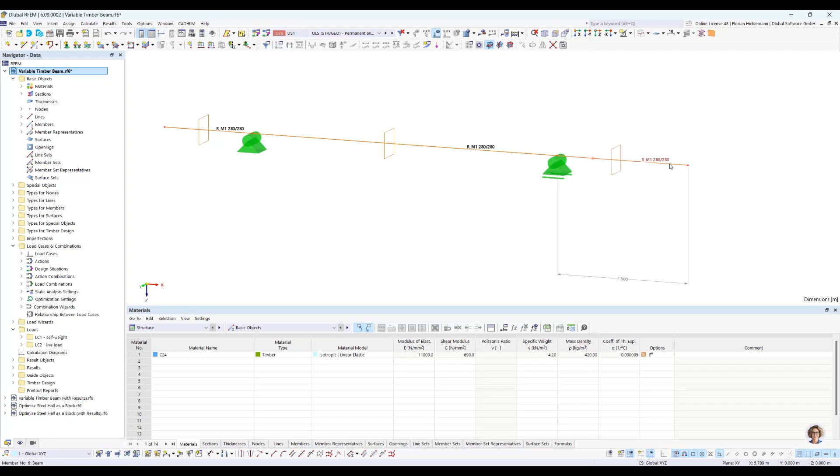So let's dive into the program. And as you can see here, the first model is a variable timber beam. This one has nothing to do with blocks at the moment. It's just for demonstration purpose of the new features I just explained in the PowerPoint. So what do we see here? We have an easy static system. It's a single span member, and at the ends there are some members reaching out on the left and on the right side. It's a rectangular cross-section. And of course, when we are dealing with optimization, there are some global parameters in use.

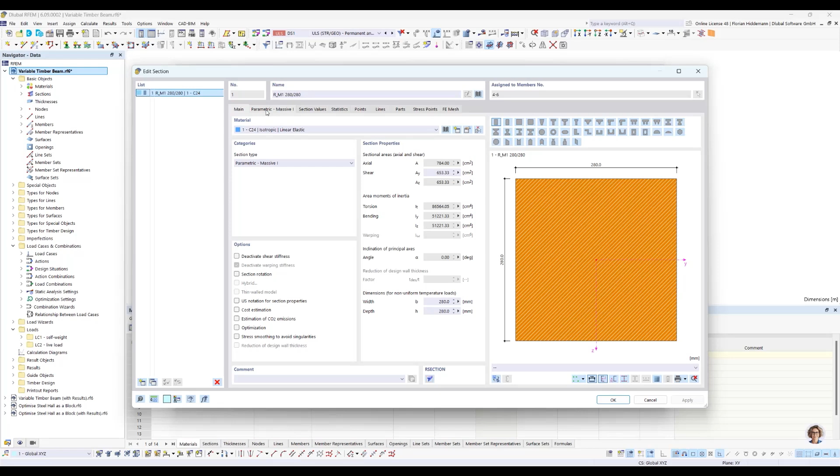So we start here with a 280 by 280 cross-section with C24 timber material. And as you can see here, the cross-section width is given with a global parameter and the cross-section height also. In addition to that, the distance of the right support is also variable. I can show you now here the overview for the global parameters. The beam length is just a constant, which is easier for me to make the model. And the left support distance here is just a constant.

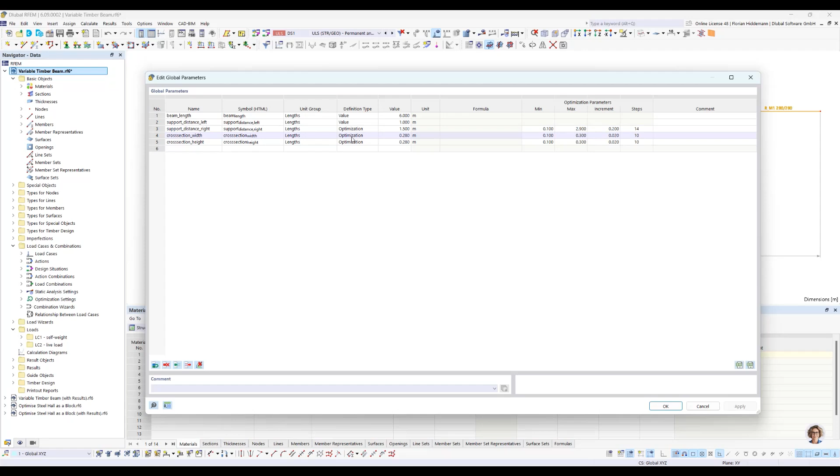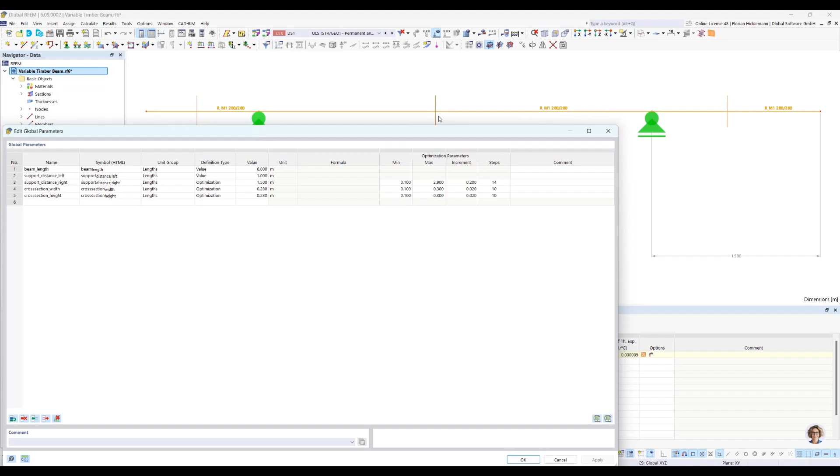And we would like, in this little example, to find optimal solutions for the right-hand support distance, which is now 1.5 meter, and for the cross-section width and height. This parameter here, the support distance, can be varied with 0.1 meter from the right side up to 2.9 meter, which is nearly in the middle of the beam. The cross-section width and height is going from 100 millimeter to 300, and it's going in steps of 20 millimeters. So you have 10 steps in between, and this is the variation this cross-section can take into account.

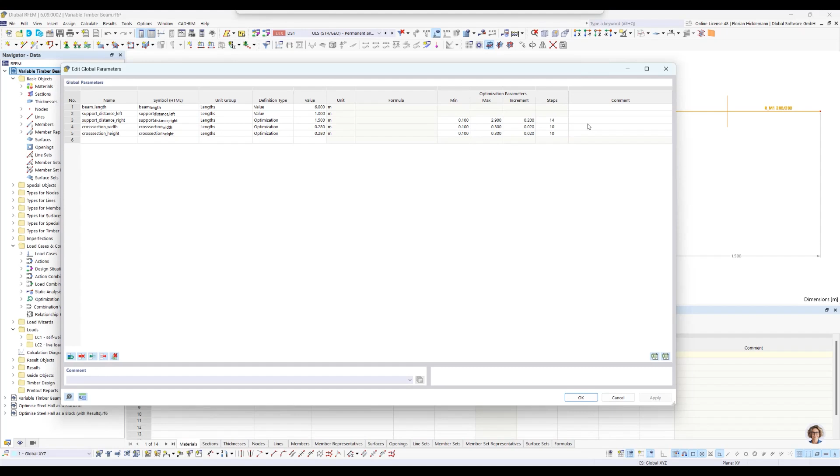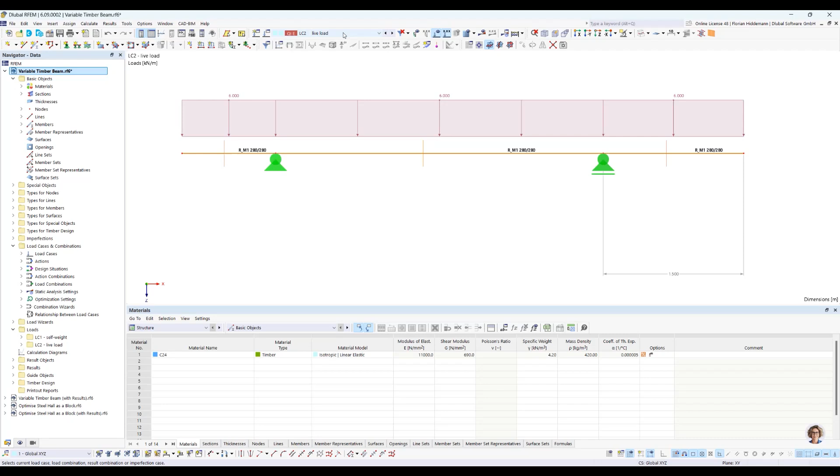So let's have a look at the first feature: recognizing valid mutations in the result list. So for this reason, I activated also the Timber Design add-on. As you can see here, Timber Design is activated. And I just made, for the demonstration purpose, easy loads. You see load case 1 with some self-weight. And there's another load case with a live load. We use here the German National Annex, of course, and a combination with it.

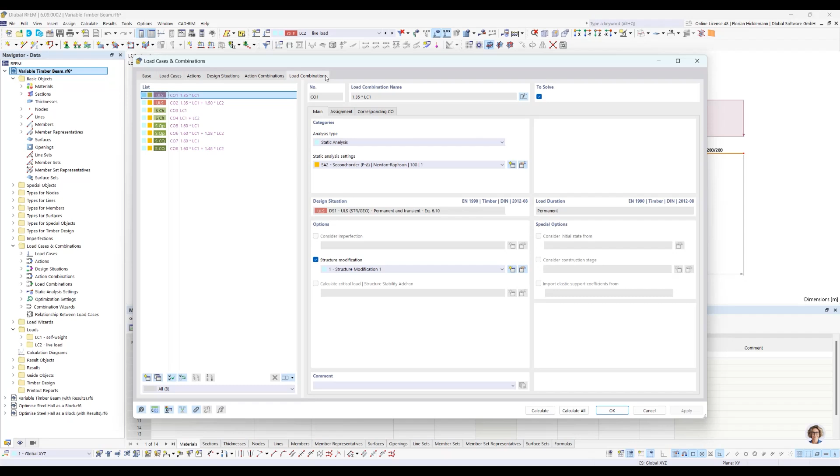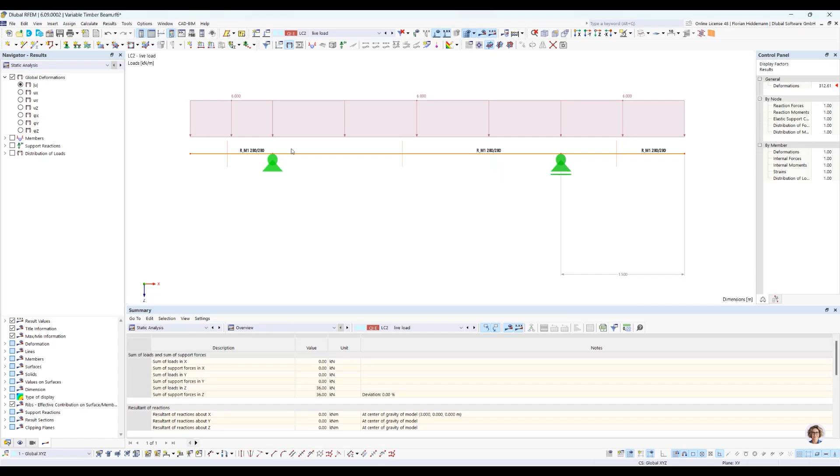So you can see design actions. It's all standard, which you are maybe used to already, that we do some combinations and design situations for you. So you don't have to worry about all the timber design specialties. So let's calculate the system in the first place to see what we are talking about here. So now it's a standard calculation without optimization. You can see in each run later on, all these calculations are performed for each mutation.

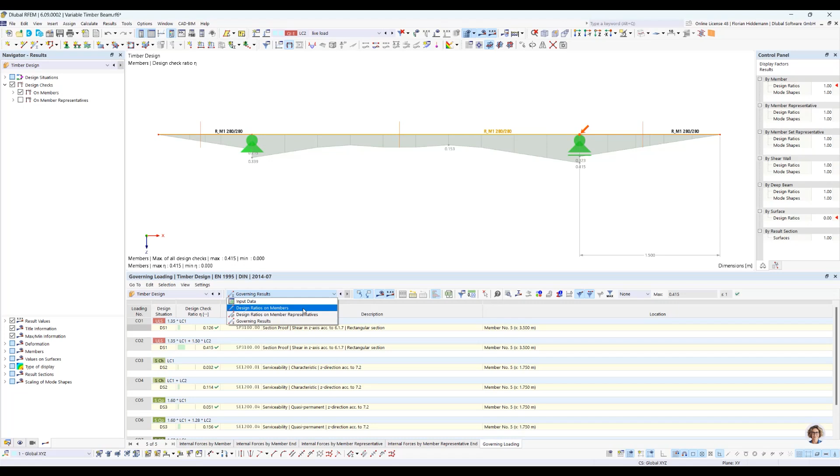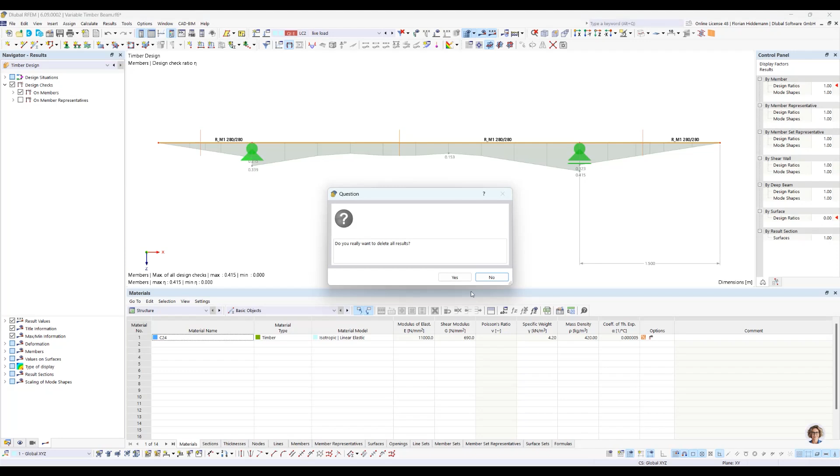And as we can see in the governing results of the design add-on, everything in this configuration looks fine. But we are here to find out if there is an even better configuration or not, and to play around with our optimization feature to see what is happening there. So let's delete these results and jump into the optimization settings. You can find it here under Calculate if the optimization add-on is activated.

So you can store different optimization settings. It's not necessarily one you have to fiddle around with. You can copy it, modify it, and use them for different purposes. This is quite handy because there are a lot of settings you can do, and so you can remember each different optimization run later on.

So what do we do now in the first place? This feature I show you later on. This is the multi-stage mode, the multi-stage calculation. And even with this very simple system here, all mutations would have a total number of 1,815 optimization mutations. This is a lot if you consider that this is a very easy and simple system here.

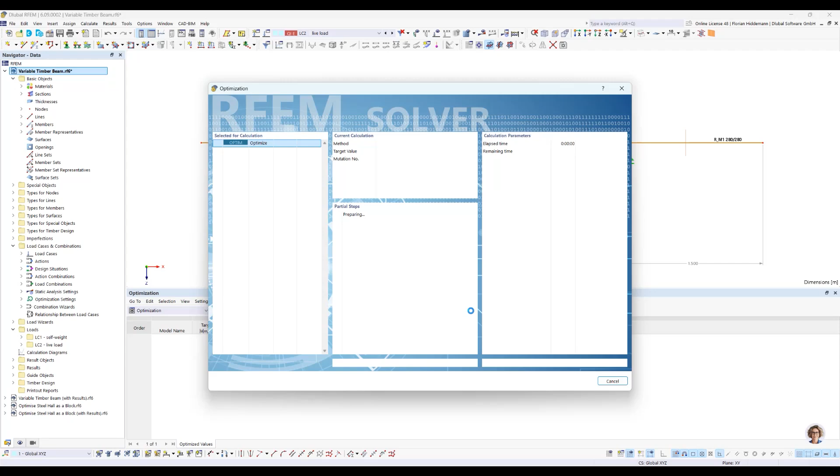So as you can see in the background, the first iterations are calculated. Each one of these mutations is also calculated within the timber design add-on. And for this reason, you see model number 1, calculated with these parameters, didn't fulfill the design checks. Model number 2, like in our first example, fulfilled it.

So with this algorithm here, it's just a random mutation. There is no clear strategy for finding the optimal target value. The program at the moment is just giving random examples for these 3 values or parameters and collects all the results. So with this nice feature here, we can see easily which calculation fulfilled design checks and which not.

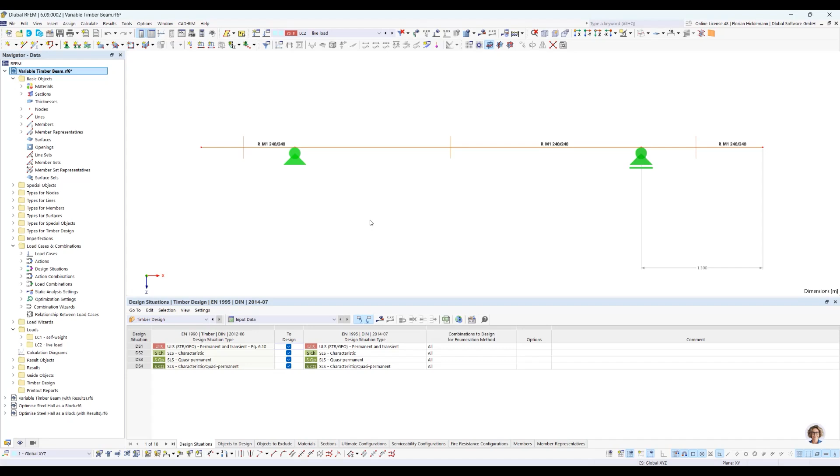And now if I cancel this calculation run here, today I will be mean to this model and cancel it anyway. So what you can see here, the calculations performed up to this point are stored. We have now 8 results. And as you can see here, the green checkmark means, it's very important to see it again, this model is now active, and because I canceled the calculation run, the add-on doesn't calculate the last cycle. So if you jump into a new model in the list, you have to calculate the model itself.

We store only the results you can see here in the list. Obviously, we don't store every full result which is calculated for each model. If you have a bigger model, that would be hundreds or thousands of results. But we collect the target value and everything you need to display this result table here. From this point, you can then regenerate your model because the add-on varies the parameters as they are stored here, the way the model mutation shows it.

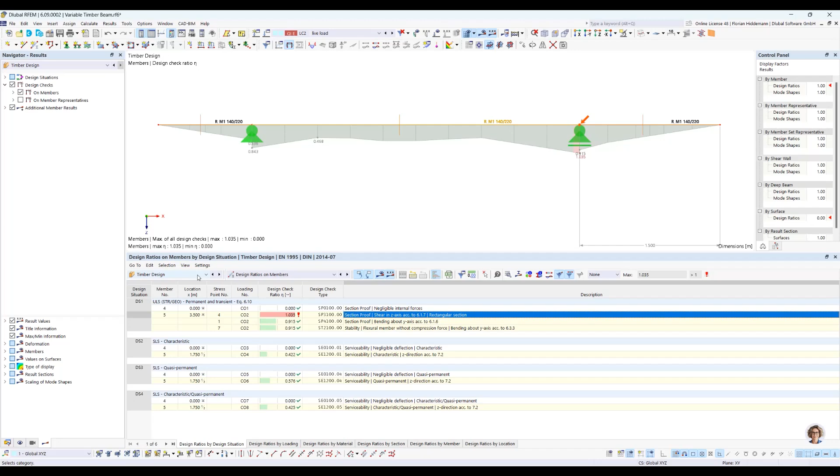So for this model number 7, I calculated it now, and here's a green check mark. And as you can see, this means that every design verification, every design check, is fulfilled. So let's see model number 1, for example. I change it here, perform a calculation to see what was going on, why there is a red exclamation mark. And as you can see, close, but it counts. The section proof here at this point on the left side is not fulfilled. So this is the way this list works with these indicators.

The next feature: the results list remains consistent. It's easy to show now because I canceled the first calculation run, and maybe at a later point, for example now, we would like to go for a new optimization run. So all I do now is say, okay, try to optimize it with a particle swarm, calculate 2% of the possible optimizations. As every time, I make the optimization cycle here active. This is kind of a safety feature so that you are really aware you perform an optimization run and don't do it accidentally if you calculate all.

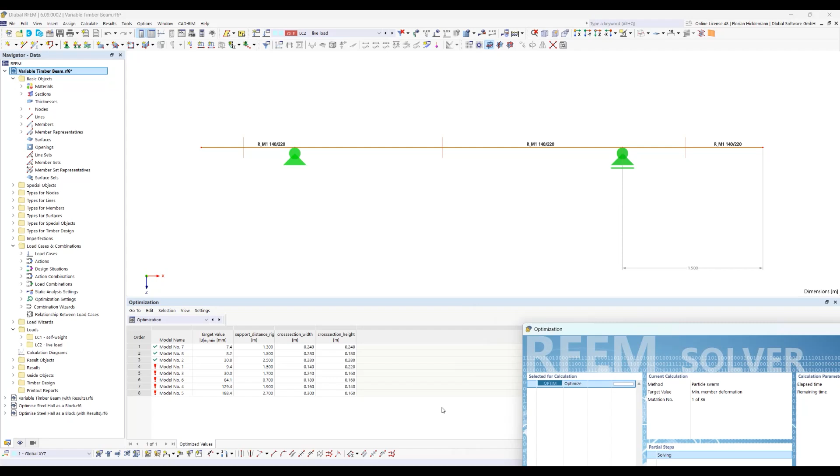Okay, so what will happen next? Let's see. You can see the results list here is stored. There is no new list, and this is a small feature, but very useful if you already spent some time with your model and calculated it, because now the optimization add-on checks each new mutation. Before it calculates it, it looks into the result table and sees if this mutation was already calculated upfront. If this is the case, we jump automatically to the next mutation without calculating it. And if the model mutation is a new one, not stored in the list, the add-on just calculates it and adds it, like you can see here in the background.

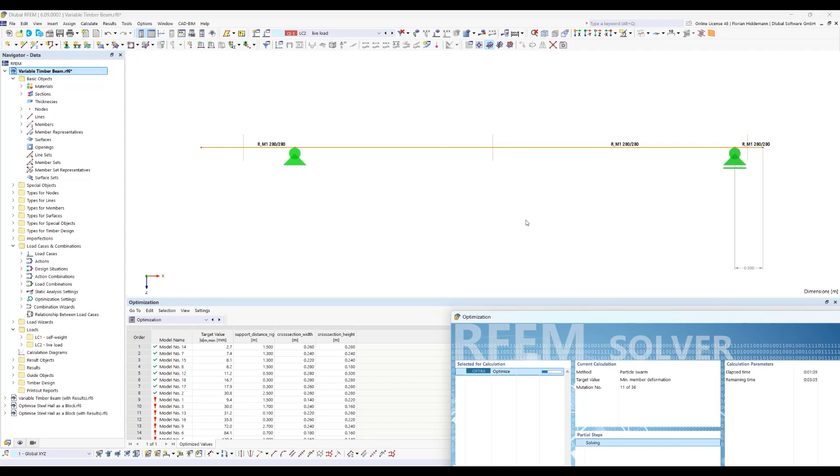So as you can see here, now it's more straightforward because the particle swarm is a solving algorithm which tries to vary these parameters with the target value in mind. And the more you calculate, the more it gets, let's say, a mathematical feeling for which parameter needs to be adjusted in what way to achieve the best target value, which at the moment is the minimum member deflection at every point. So the 2.7 millimeters, let's have a look into the program and cancel it again.

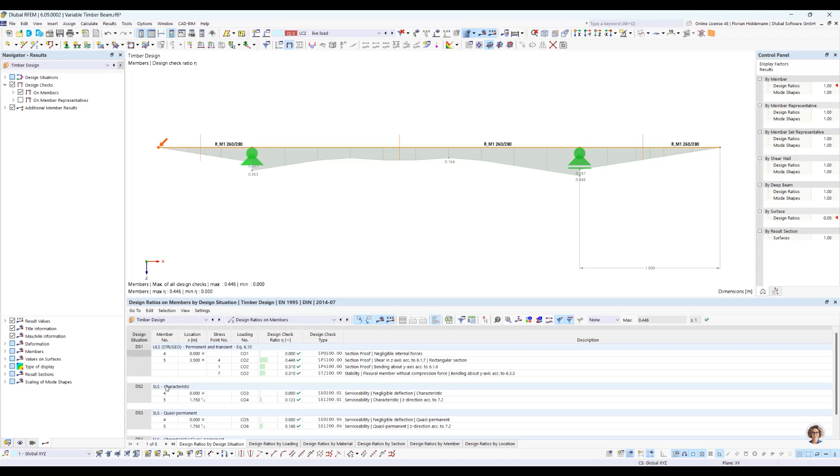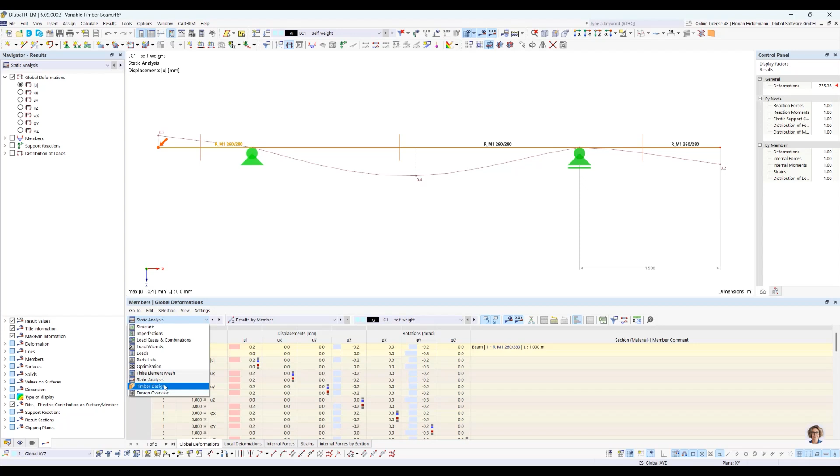Because we aborted the calculation, I need to perform a manual calculation of the system here. So let's see. Every design check is fulfilled. And for the target value, it should be there. I go to another model. Okay, yeah, I found it.

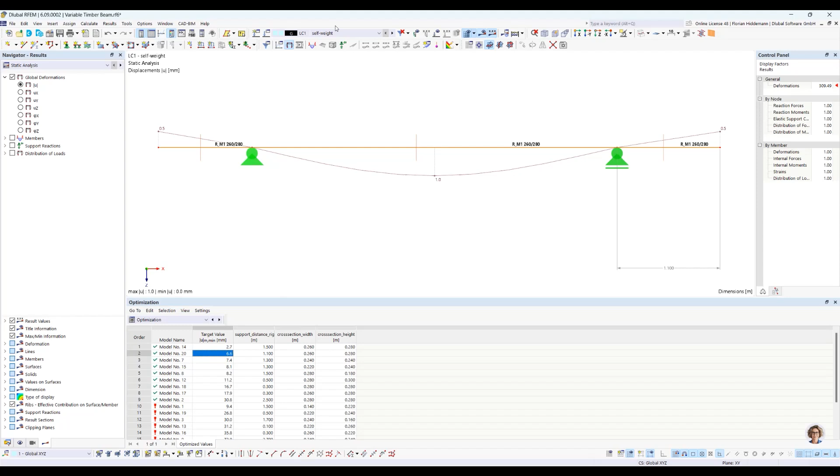Okay, we are looking for 6.6, and this is considered in the overall design situations you set up. So if I go to the maximum load here in design situation 1, the ultimate limit state, here you can find it's this part here in the members is 6.6, and this is considered as a target value. It is looking for a global minimum to minimize the maximum member deflection at any given point.

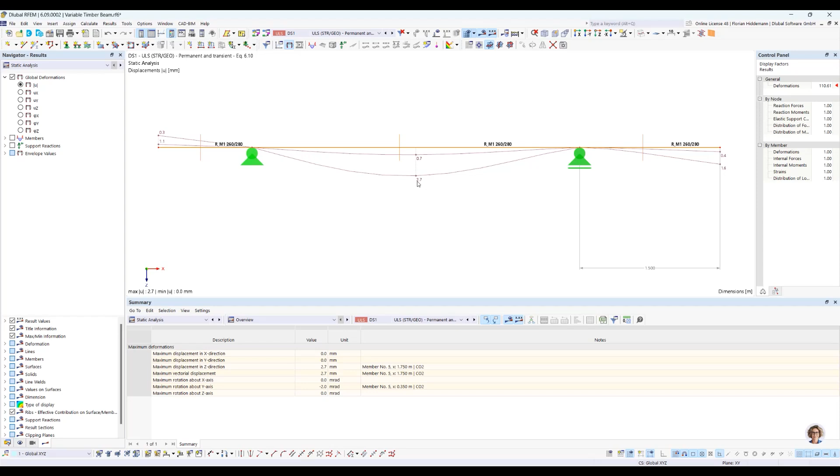I'll give you some time to let it sink in. And now we are able to find out the 2.7 millimeters. Just to be sure what's going on here in the background, you can see the 2.7 at this point. So this is a small introduction example for working with the list here and its ability to store results from every optimization run.

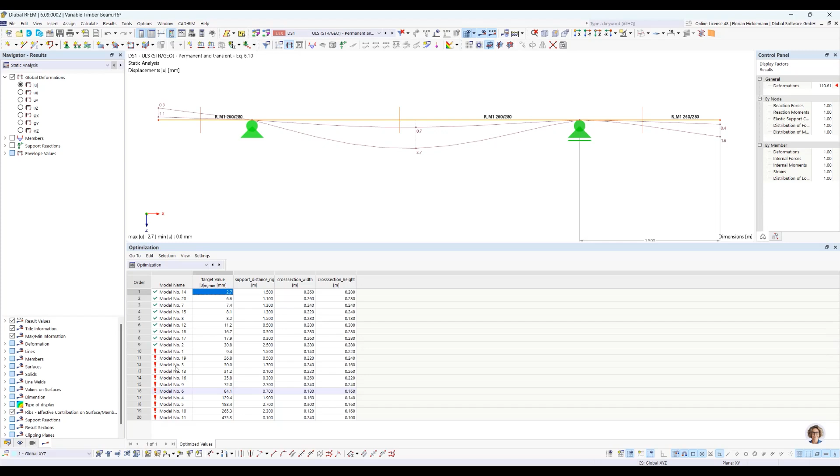Let's go to the next topic, the sensitivity factors. What is going on with that? In the model now, we have 20 model mutations calculated. And now here in the table of the parameters to optimize, you can see some sensitivity factors. They are now estimated given by the model results list here. So we can now perform an analysis of how the target value is influenced by varying different parameters. This estimation gets more accurate the more models you calculate.

With this small amount of 20 models, you can see the cross-section height should have a big impact on the desired member deformation, much bigger than, for example, the cross-section width. If you're familiar with how stiffness in such a system works, that's absolutely plausible, because the height of a cross-section goes with the third order, and the width goes with the first order, into the stiffness of this beam. So it's a very plausible result.

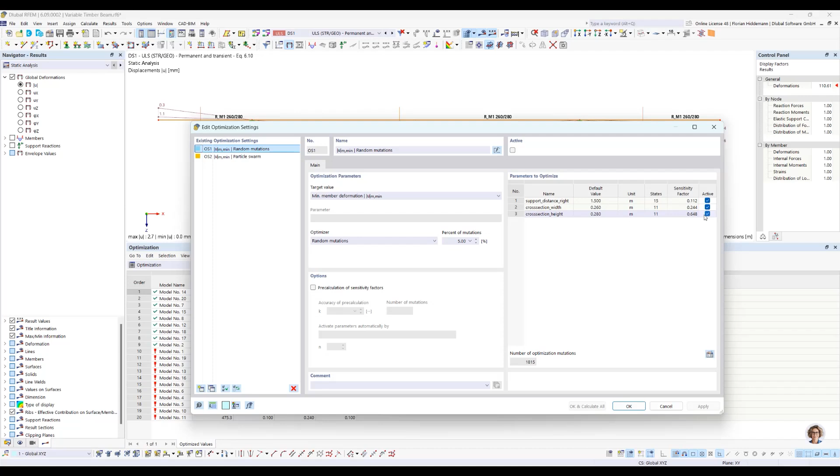These two parameters have much more influence than the support distance. That's something you can already see in this little model. Here it's easy to have an overview by yourself, but think of more complex situations where you vary different parameters and don't have a feeling for what would happen with different combinations. This is very nice for reducing the number of optimization mutations, because you can choose, for example, okay, if these ones are so impactful, why should I spend calculation time on this one? As you can see, it reduces the number of optimization mutations drastically, because now it's 11 by 11 and not by 15 anymore. So here we have 121 mutations.

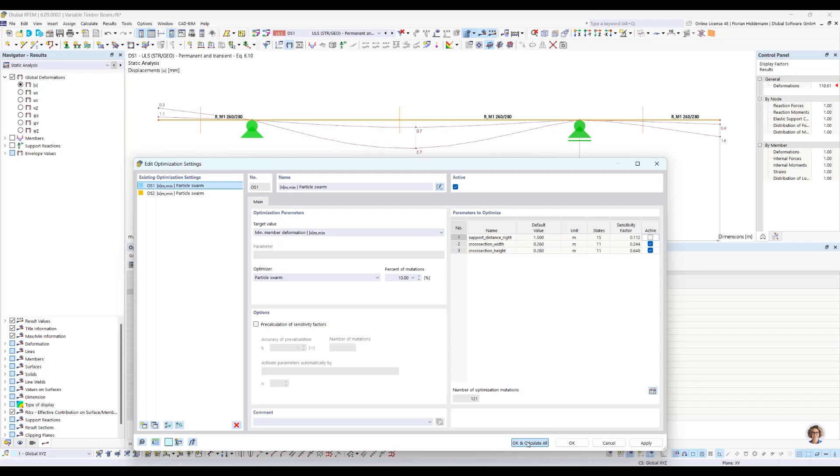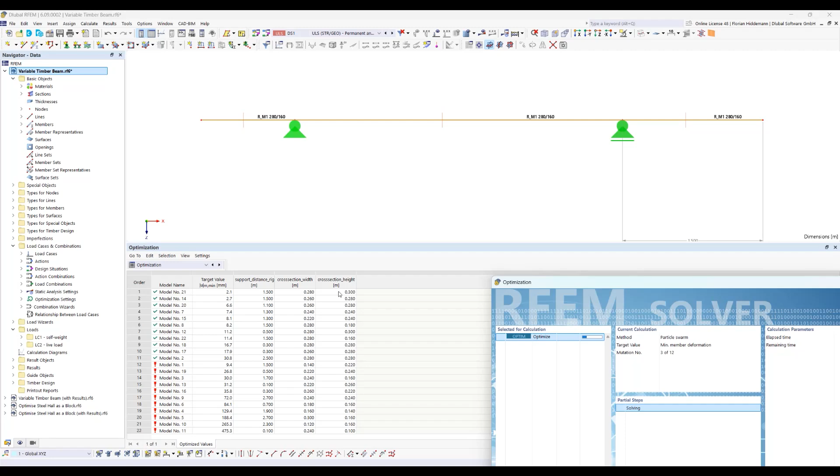And this is much easier for the algorithm to perform, with more potential, better mutations. So now, because I set it here in this dialog with only these two parameters active, the model fixes the 1.3 meter support distance and just varies the second and third one. Okay, this is a basic introduction, remembering our new features.

At this stage, I can show you the multi-stage calculation as well, and for this reason I would go back into the settings, and we choose another optimization setting here, and now we have a look at this option, the pre-calculation of sensitivity factors.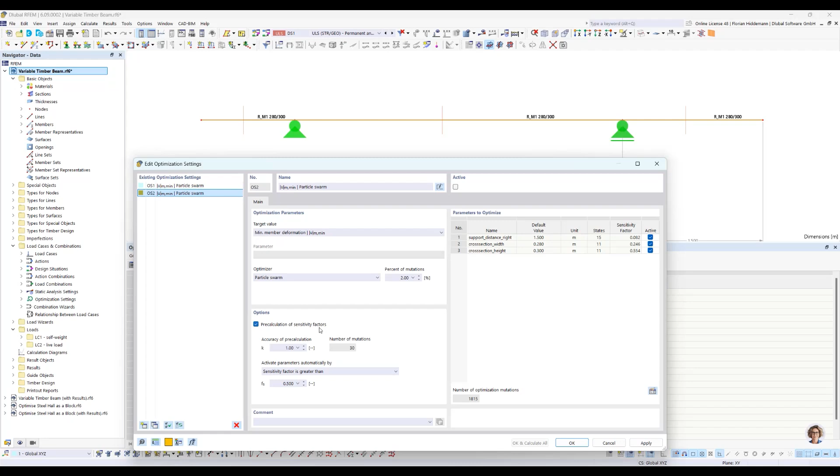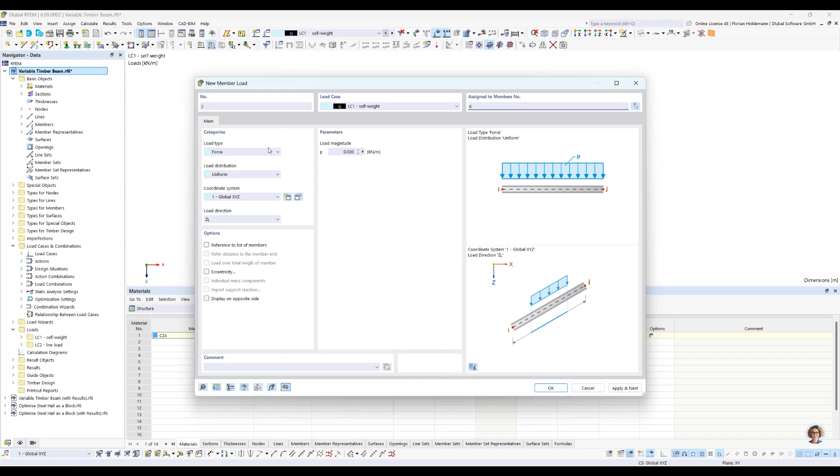For this reason, I will empty this list by varying the model. This is something you need to do now, because the list is stored. What I do now is delete a load here. And if you change the model in a drastic way like this, all the results are deleted. So make sure you're aware that this will have an impact on your optimization results. Now we can start with a clean structure here.

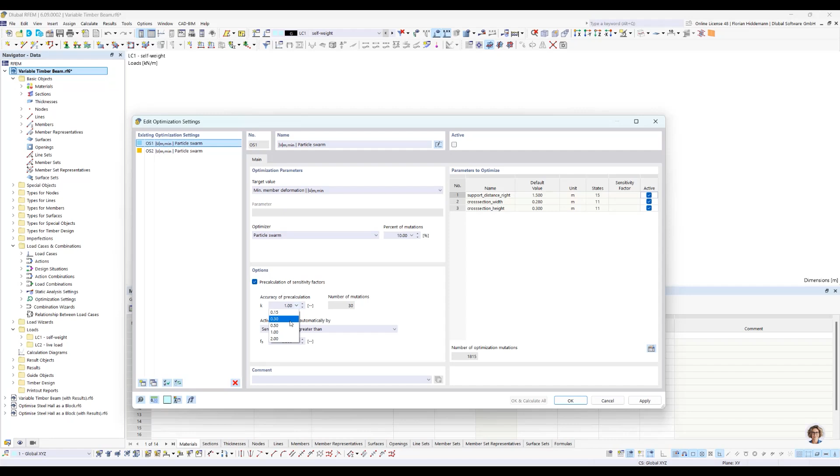For the next run, I say please make a pre-calculation of the sensitivity factors. In this example, let me make only a small guess with, let's say, 5 mutations. After that, the program should automatically combine 2 parameters in each following optimization run with the highest sensitivity factors. So it's a bit abstract and complicated, like most things with this add-on, but let's see what's behind it.

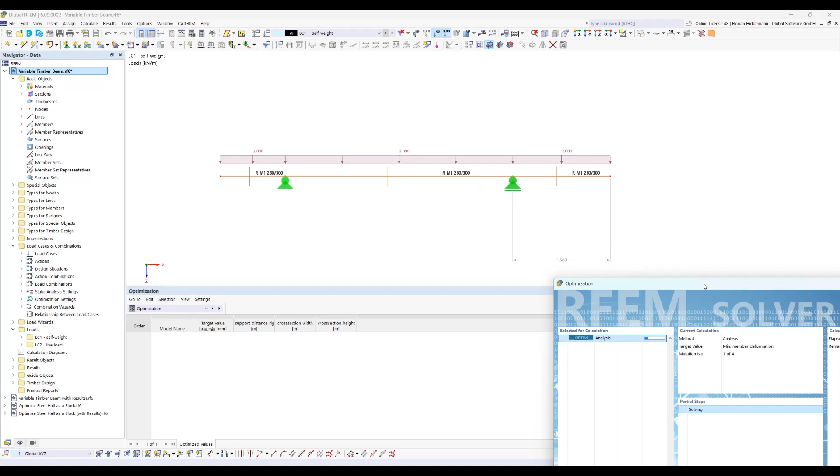So now we have a multi-stage calculation. In the first place, we are doing the analysis. The model is now varying some parameters with a very small amount of models to guess the sensitivity factors. It's analyzing the results here and the impact, the estimated impact of these parameters on those result values. And as said before, the more mutations you calculate, the more accurate this estimation is.

And now it goes to a second step. It uses now the results from the analysis. And here it is combining the two most influenced parameters with a particle swarm that calculates 10% of these possible combinations. And the 10% is now only 16, not 181. I'll show you that afterwards.

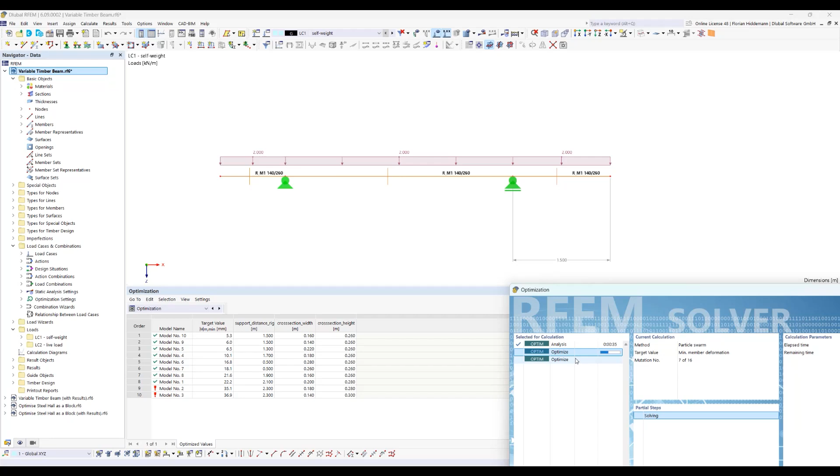And you can see after this optimization run, there is another optimization run waiting. In the next optimization run, the program goes further and says, okay, I have now combined the most influential with the second influential parameter. And just to check it in another run, I go through and perform a calculation with the second best parameter and with the third best, because you choose to combine two parameters at the same time. This is the strategy the program is choosing to go through these combinations.

So the total amount of calculations is the first one from the sensitivity factors, 4 in this example. And after that, it's here 16, and then depending on the other value, around 15 to 20. And it's much less than 10% of all 1,800 model mutations. Here it's only one. Interesting.

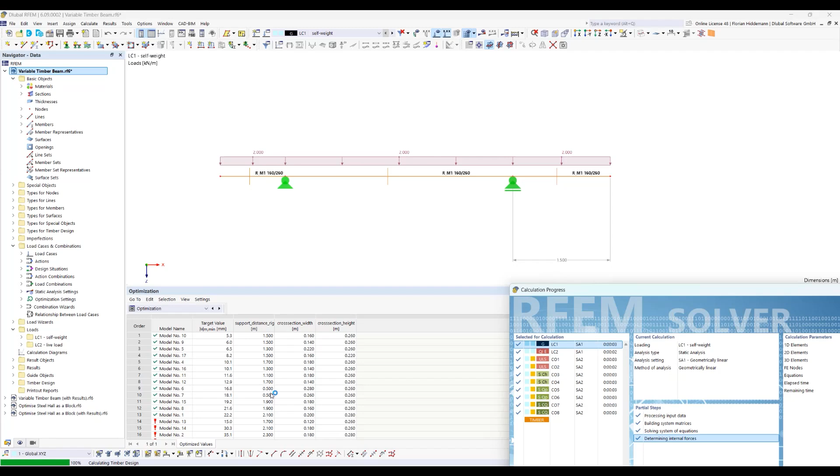So let's have a look into the dialog, what could happen here. As you can see, we have with only 17 calculations, quite some optimized results. But with a small amount of calculations, the sensitivity factors are not guessed very properly. Here it's now a very big difference on these ones. And you can do it better by giving here more accuracy of the pre-calculation with, for example, 30 mutations.

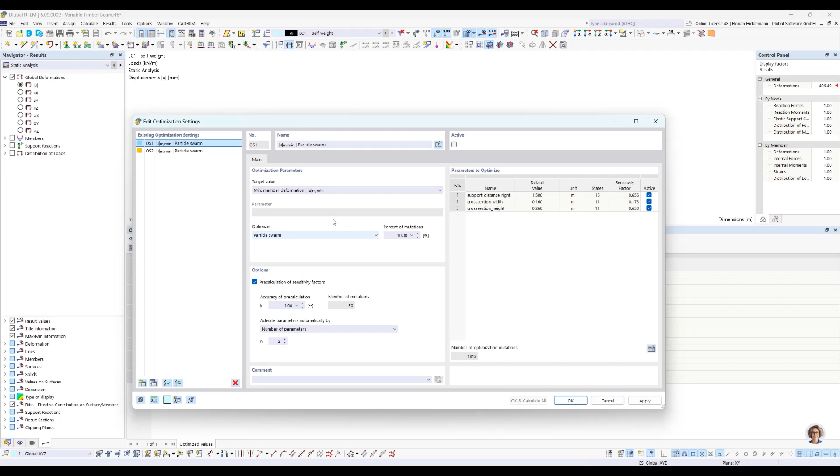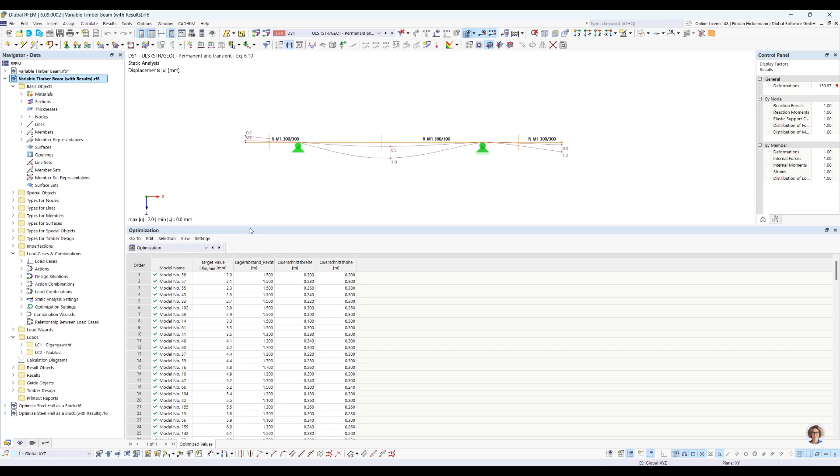So our recommendation here is to choose higher numbers if you feel the calculation is not so straightforward, going to the point afterwards. But this for now, to demonstrate the possibility of our multi-stage calculation run. If you have already done more calculations, I switch to the same model here. And I did a pre-calculation. So we have here 217 calculated models.

As you can see, the sensitivity factors here are more accurate now because there is a big result list which is analyzed. And this is more or less much more plausible from an engineering point of view.

What is interesting now is that that's also a nice feature. It's new because we have a consistent result list now. You can change the target value afterwards. So for now, we did the member deformation, the minimum member deformation at a specific point as a target value. So obviously, the height of the cross-section, the width of the cross-section, and the support distance. I'm sorry that these are here German words.

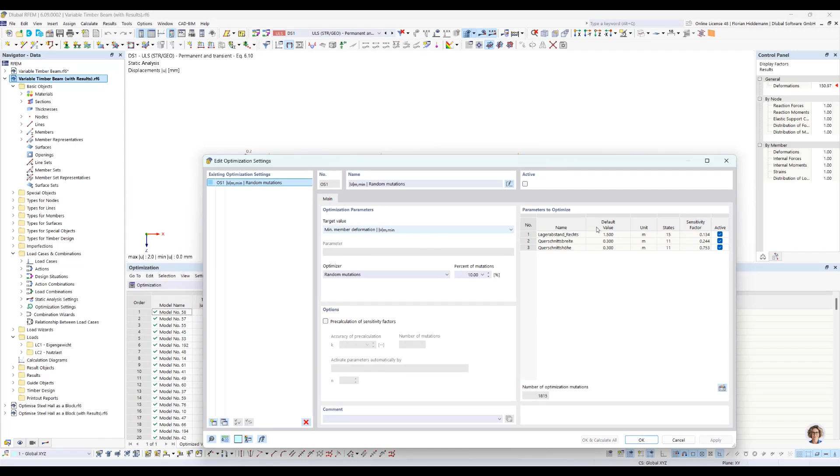If I would have translated them, the results would be deleted because it's changing the model. So I'm sorry for that, but I hope you can go with me. This is the support distance on the right side, the width of the cross-section, and the height. Obviously, the support distance should have no impact on the weight of the model, but the height and the width should be more or less equal, right?

Let's check it. And we switch now to the minimum total weight. And as guessed, these sensitivity factors here are now changing, because now if you are varying the width and height, these influence the area of the cross section in the same way. And guessed correctly, it's quite equal. And the load distance, or the supporting distance here from the right side, has in reality absolutely no impact on the weight of the construction, because it's just a load bearing point.

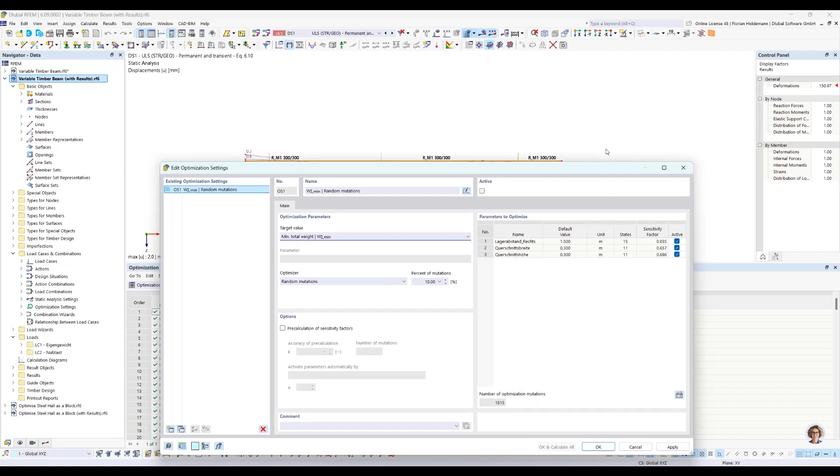What's interesting is the more you calculate, the more this value will go to 0, because it's an estimation based on the list here, and our algorithm is already seeing with that amount of results that the influence of the desired target value is very small. So this is quite nice to see what you need to verify in your model to achieve specific targets.

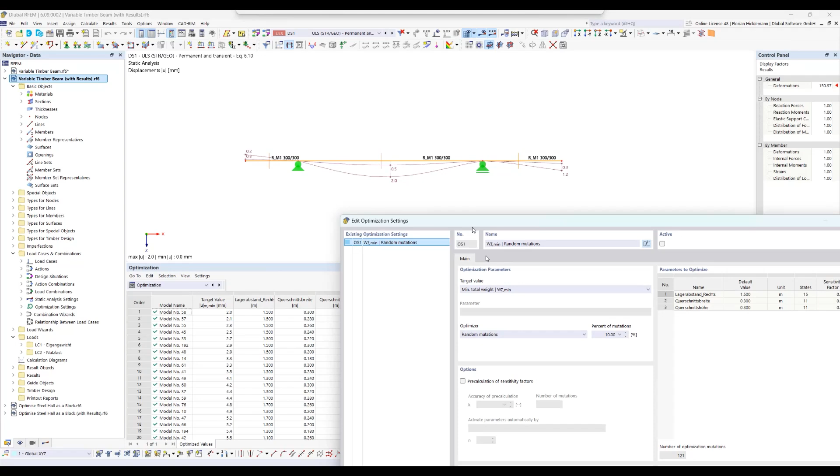You can see here that in the list, if I change the optimization value and start a new run, let's do it with a particle swarm. Just started. Let's see what happened. It's now changing. And this is also a strong feature. You can use all your existing calculations for this.

So we have now 200 already existing calculations. And because we stored the target value in each previous optimization run, as well as the desired minimum deflection, if there are surfaces, the minimum surface deflection, and so on, every available target value is stored with each mutation, even if you didn't activate it in the dialog. And this is very useful if you have different perspectives on your construction and you want to try out which one is the best for the minimum total weight and which one is the best for the minimum deflection.

It's the first step into going to multi-target optimization runs. Behind the scenes, we are already thinking about those features, but it's a small step, step-by-step way of going towards these goals.

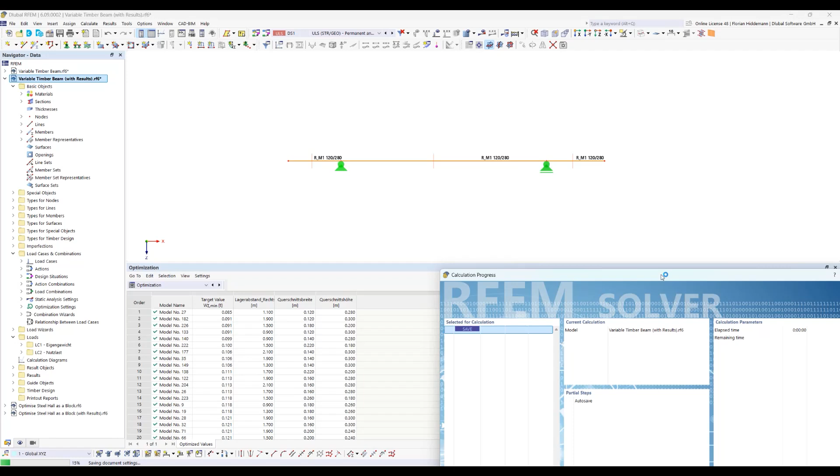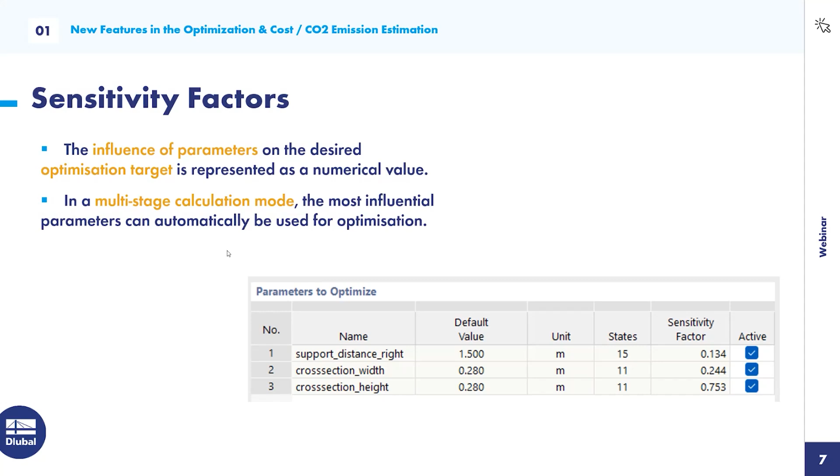Okay, so now you saw everything. We can change the optimization targets. We store it across different optimization runs. We have a multi-stage calculation mode, and maybe you are already waiting for the title-giving feature of this webinar, the optimizing blocks.

This is just an inspiration because maybe you found out in the past, if you are working with global parameters, there are some restrictions, because global parameters are very, very useful to play around with the geometry of your model. And you can use it in so many input fields that are quite helpful to steer your model and create the geometric system you would like to have, and also can add static values, resistance values in many different ways.

But maybe you experienced also some restrictions when it comes to demanding construction rules. If you have a more complex statical system or construction you want to try out, you can use a block, because blocks are perfectly fitted to generate your model with your own specified rules, algorithm, programmable. And with a block, you can build your own configurator.

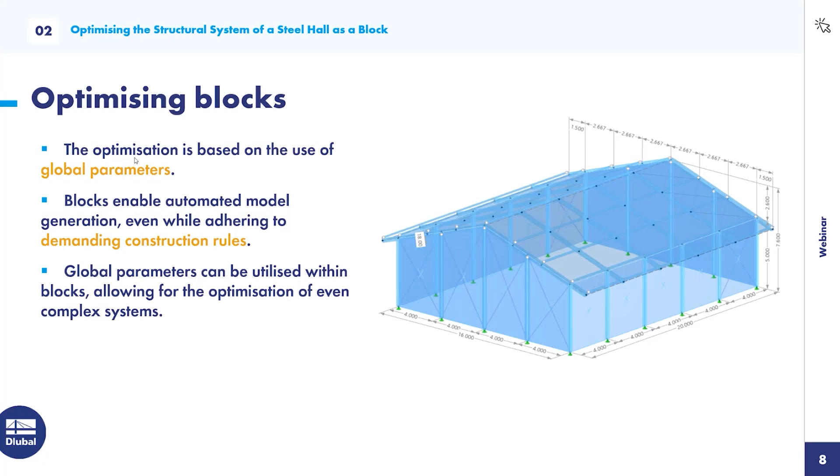I've done some pre-work here because this needs some time to set it up. And so I would like to present what I did here and show you what is special about this model. So in this model here, as you can see, this is everything.

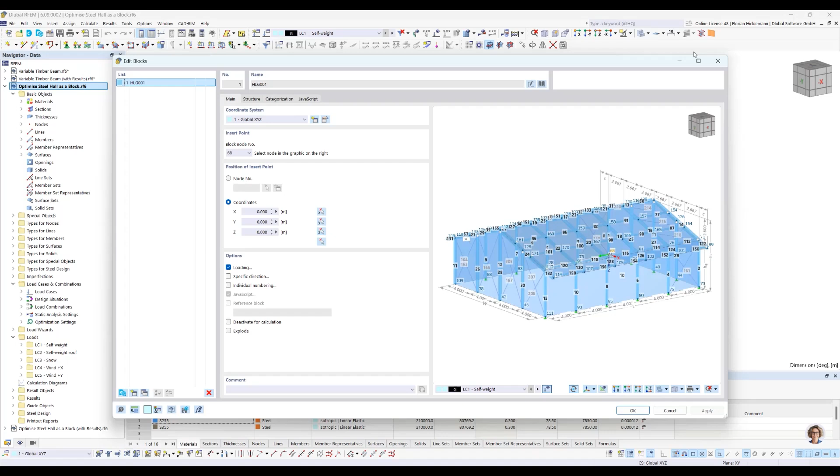It's a block. In the webinar next week, you can see, if not already known, how to edit it, how to import it from the Dlubal Center. Here for the moment, let's just stick with the idea.

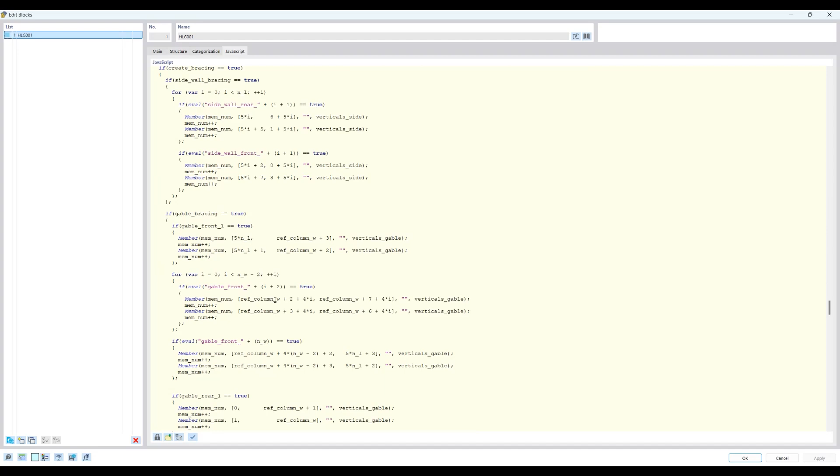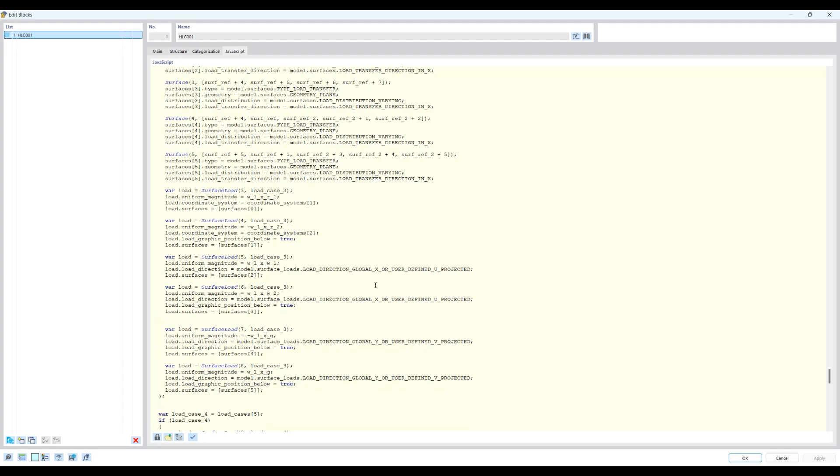A block is a programmable object where you can define in JavaScript what is generated, what is steered. It's using internal features of our programmable API. And here at the moment, what you can see here is used JavaScript as a language for this.

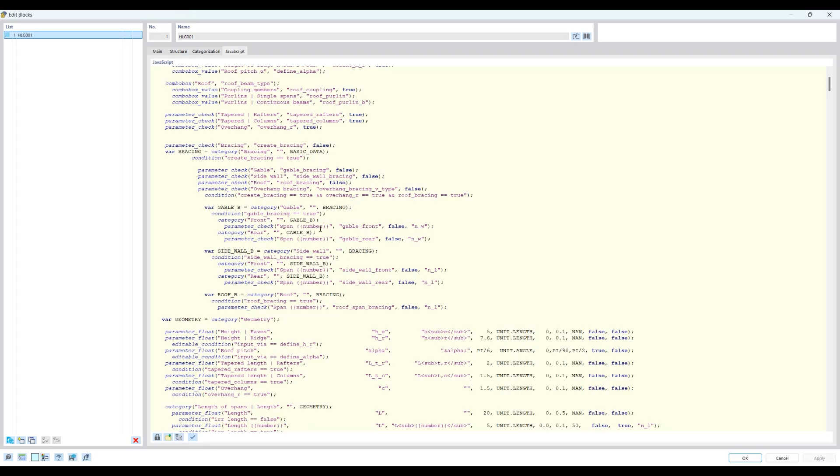So as you can see here, the whole steel hall is defined with these functions and API calls. What is provided then, based on the structure here, you also define a parameter structure, and depending on what you are programming for the block, you have now your own input fields you use in your program.

And this enables you to work with more complex structures. For example, this block is programmed in a way that automatically a bracing is activated here. You can see it here. If I unclick a checkbox, the bracing is updated. Yeah, it generates in the background a total new model. The numbering is different. Everything is different.

So have in mind that you can play around this, just the borders within your fantasies and our abilities to work with JavaScript, obviously. But you can really do some fancy stuff with it.

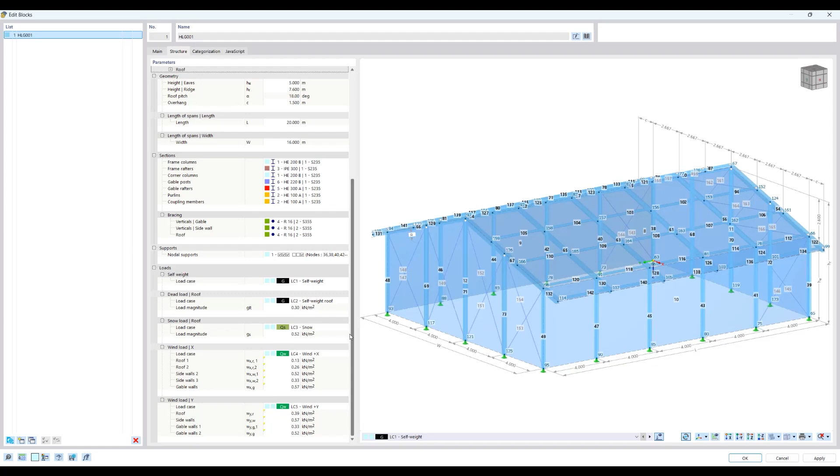I set it up here, the input fields, to connect it with the materials, cross-sections, and everything which is in my model. And just here for the, let's say, pre-calculation as an example, I added some easy load cases, leaning into a realistic load case scenario, but we are not rebuilding here our wind load generator or snow load generator. This is just for demonstration purposes and to give you an idea what is possible with blocks.

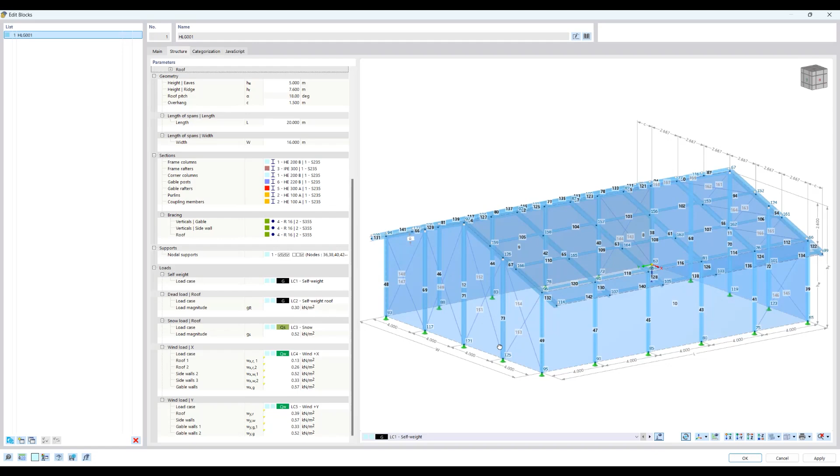And if you have an engineering problem which is worth spending some time with, which you are doing with a lot of repetitions, or you need to optimize it and there is something you would like to dive more into, keep in mind that you can program a block and then connect it with a global parameter. That's a trick for today.

I can just edit, for example, the number of spans in the width. So let's change this to 6. And we will see that here in the gable walls, the members and the bracing have changed completely. The whole structure of the steel hall is now different. I go back and change it to 4.

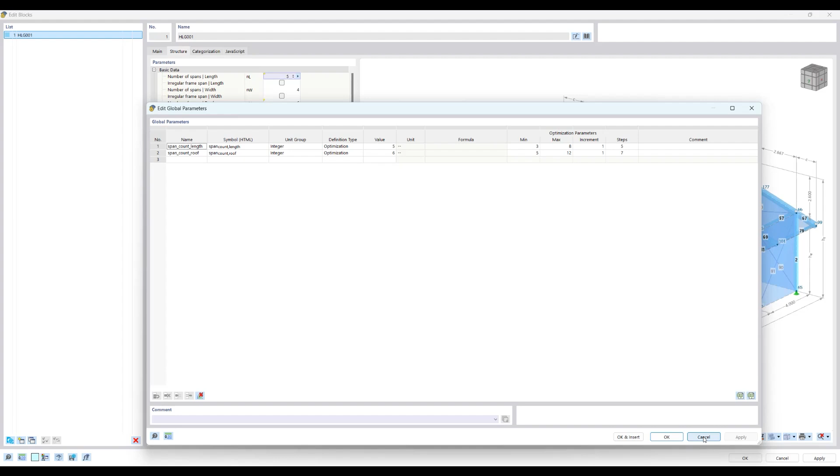So what I've done here is you can just use a global parameter in this input field. And as global parameters here, I have defined the span counts in the length direction and the span counts in the roof. And those values are defined as an optimization type. So this is a trick for today. We will optimize and play around with the span count, length, and roof, and vary them from 3 to 8 and 5 to 12. It's 5 by 7 steel halls you create then in the background, and I will show you what is happening if you use it in this way.

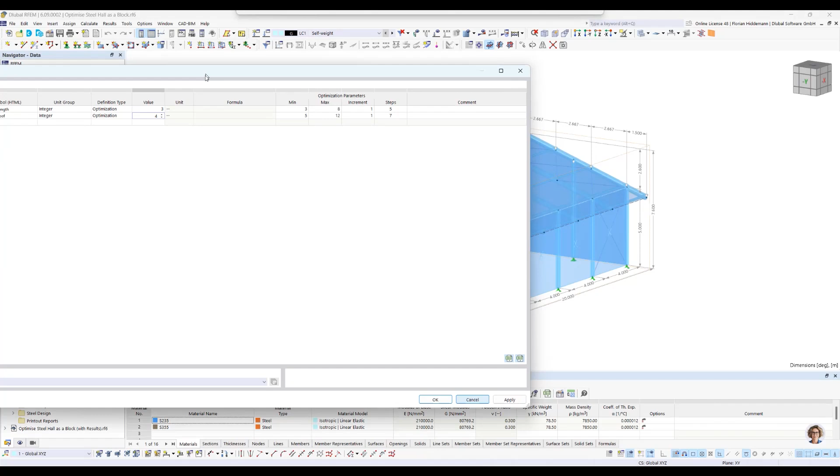So let's just go back here. Now, as explained, you can see in the construction what is happening. If I change this to 3 and this one maybe to 4, it's reconstructed.

And this is, I think, a magic way to define even systems with different statical conditions, everything that can use a number, a Boolean variable, whatever you can use later on in a block, and make complex, algorithm-based construction rules. And together with the power of the optimization tool, you play around with this block to achieve a global state of optimal target value.

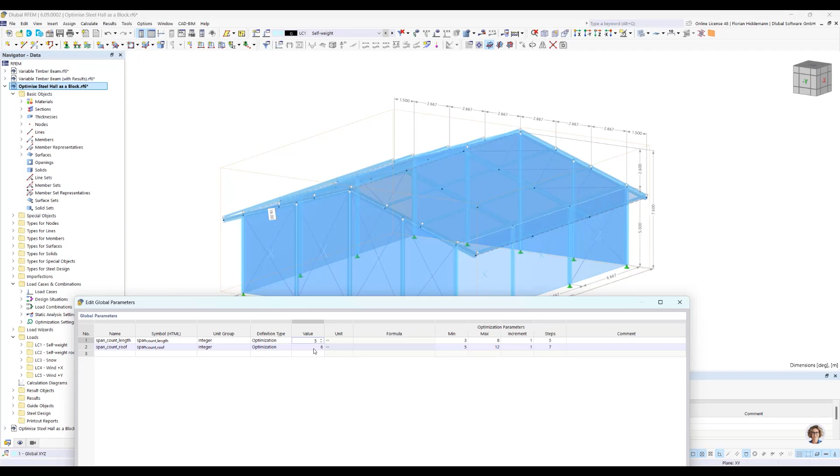So let's go back and start with maybe 5 and 8. So I press apply and you see it's a totally new construction. Oops, I disconnected my table here.

This looks interesting, maybe, and I don't want to only consider different field spans, because if I choose fewer fields, I need stronger cross sections. And otherwise, if I have more fields, I would expect that my cross sections for the columns and the bearings here on the coupling members have to be much smaller. So don't forget, you can use our optimization add-on in combination with cross sections.

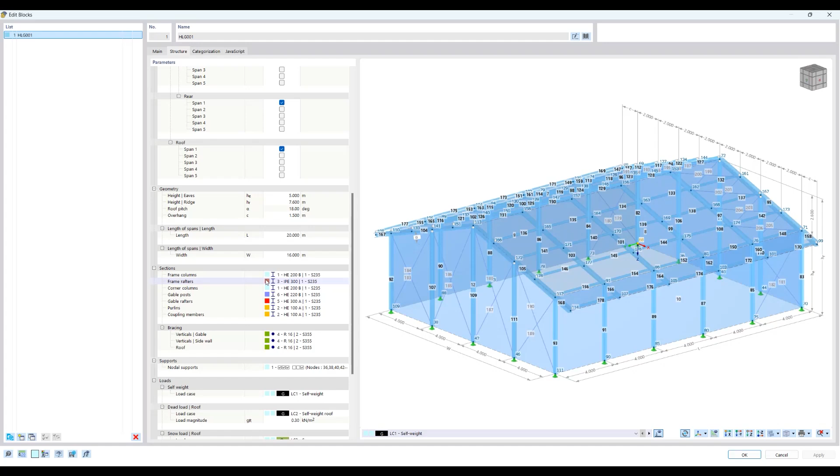So let's say I want to use these cross sections in my block, and again everything is generated and defined by one block you can see here. I connected these cross sections here to the code in the JavaScript. And now I can go to RFEM and say, please optimize this cross section I used. You only have to click here, and this enables the optimization feature for this member.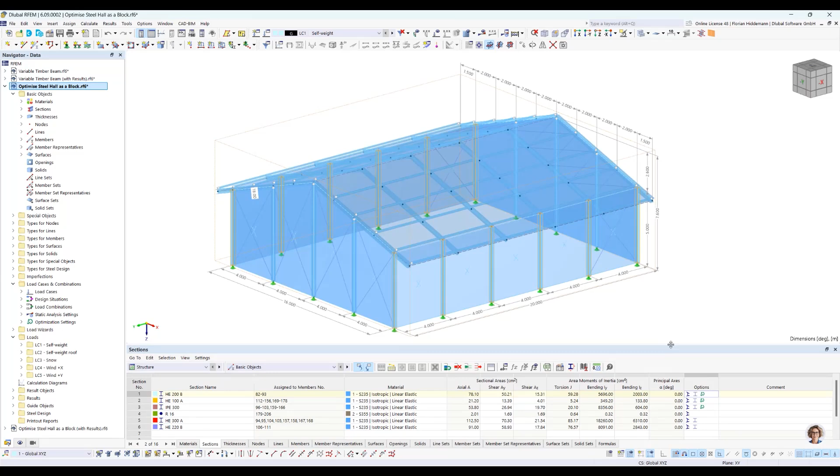Let's jump into the optimization settings. Here you can see, let's try it out. If you combine only the states for the length and roof, you have 48 steel halls, because it's taking the minimum value and the maximum and the steps in between into account as a state. And if you multiply it with all possible variations of the cross sections, you get almost 500,000 possible steel halls.

And who of you wouldn't like to calculate them all by hand? For me, at least, it would be painful.

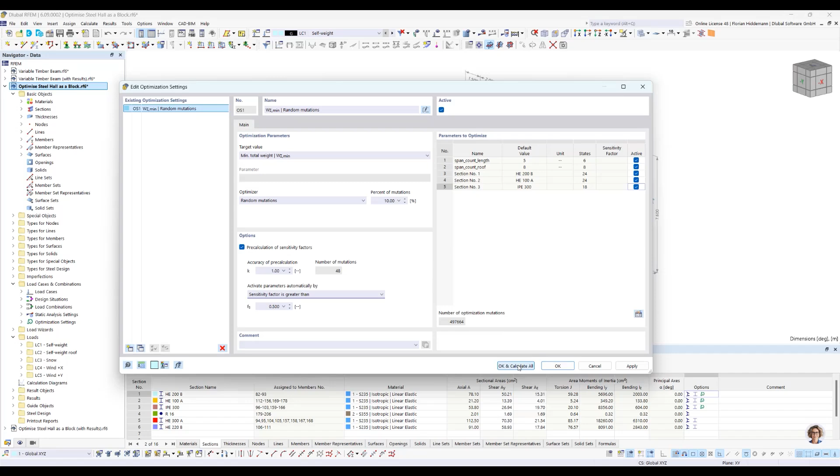So I rely on the multi-stage optimization run, and want to see if there is some construction winning the game for a minimum total weight. I want to have calculated in the later run only sensitivity factors which are greater than 0.5. And in the first run, pre-calculated with 48 mutations. So let's just test it. Now, I'm totally aware that this is not the end of the story.

If you have a system which is quite optimal in this way, and you have done many steel halls or comparable projects in the past, of course, you have to work in a more detailed and specific way later on. But it gives an idea what is possible if you program complex structures, because you can define almost everything which a design add-on is also needing in the background to evaluate this whole.

And remembering our little green and red indicators here in the resulting list, the green arrow means that the first steel hall here, it's obviously heavy, but it's a first random mutation. This one is fulfilling all activated design verifications from the steel design add-on.

So imagine you have a very complex structure with different blocks. You can put a steel hall as a block into it. You can put a small next building as a block next to it. You can adapt here some staircases as blocks. There are a lot of possibilities, and steer them all by global parameters, and then vary some calculations to get an idea, let's say in the first stage of your engineering progress, to try out different designs and find out what is going for a most efficient design.

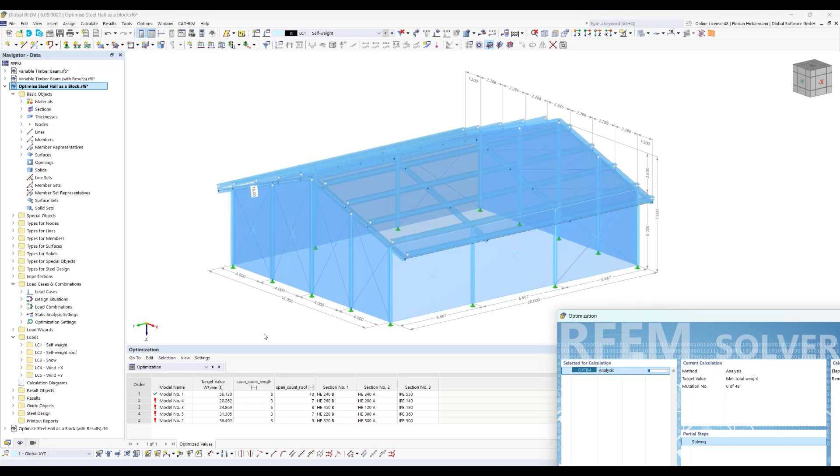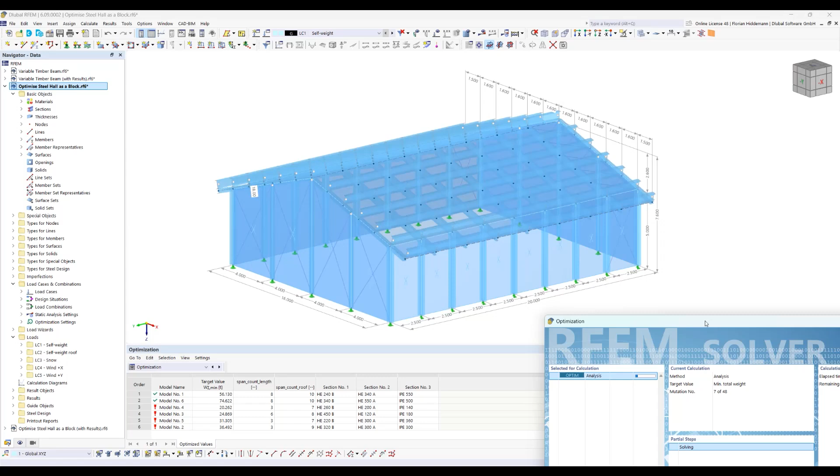So this is happening here, and after the analysis would be done, the algorithm would then choose every sensitivity factor over 0.5 and combine it later on. It will do some other stages after this optimization run, but for the moment, please have in mind the new feature is multi-stage. It's faster than only a single one with 500,000 possible combinations, because it is more target-oriented, considering the most influential parameters and only combining them in different multi-staged calculations.

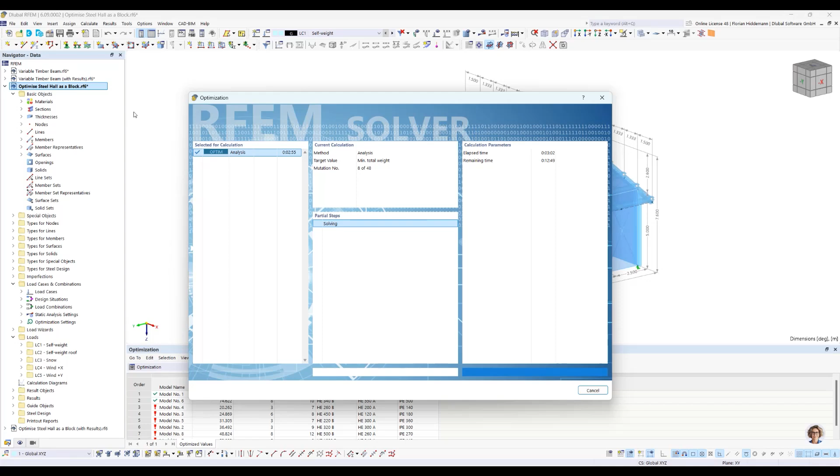So in the end, let's have a final look into the results I calculated with the steel hall in 3 to 4 hours here on my laptop to see what is possible. In preparation of this webinar, I calculated this model here as well. We have 840 calculations. I think it took around 3 or 4 hours with the laptop. And as you can see, it's a very big variation of valid and non-valid models.

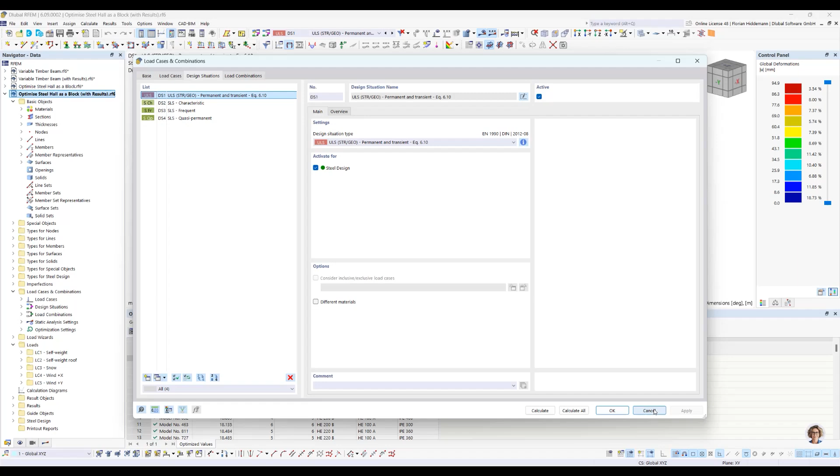And the worst valid model is 100 tons with obviously a lot of fields and HEB 1000, some big profiles. It's safe to be in it, and maybe a bit heavy, but you can also go down to 16 or 17 tons for a 20 by 16 meter steel hall. And I have to say, in this optimization run I have only considered some ultimate limit states. I deactivated the other design situations for time purposes, but if you let it calculate overnight, you can activate everything you need for a real-life calculation you are using with RFEM every day. It's just more time consuming to let it run.

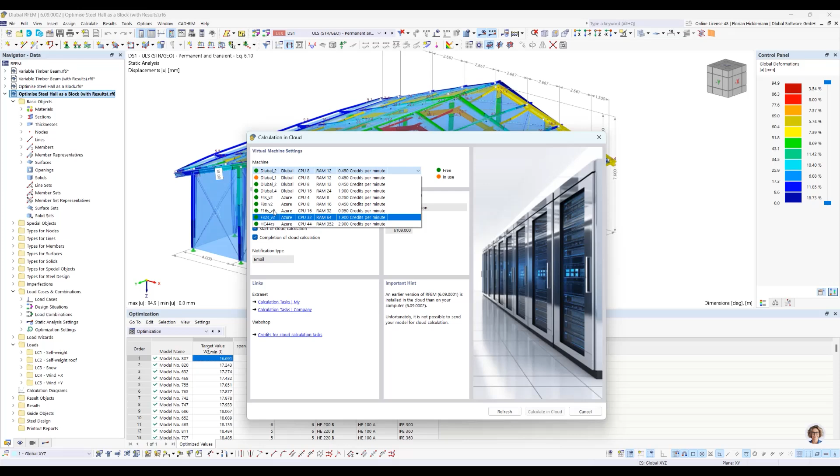But if you don't want to spend time on your local machine, remember you also have the possibility to calculate in the cloud. Next week, there's a nice webinar on cloud calculation and blocks. So you can also go to the cloud, and you have these machines available. You can put your system into the cloud calculation, let it calculate, and get the results after that. And it's then maybe a better inspiration for how to adapt improvements on your model with this technology.

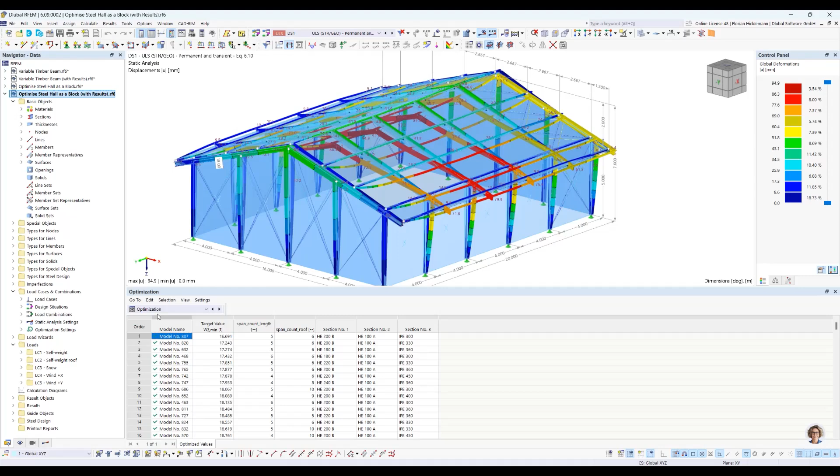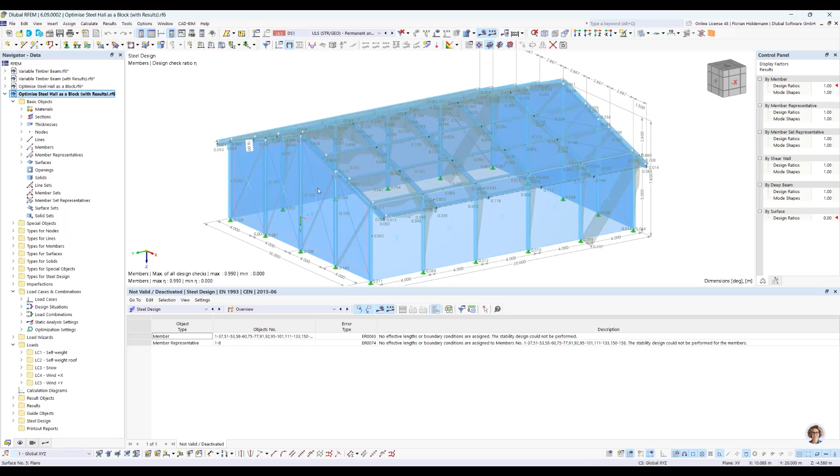And let's have a final overview from steel design. In the block, there are no effective stability designs defined. You can, of course, do it. In the preparation of this webinar, we just didn't add imperfections or stability cases to the members, but you have here a full check of everything else according to Eurocode 3. And as you can see, the best hall with nearly 16.7 tons fulfills the design checks, with a maximum utilization of 99%.